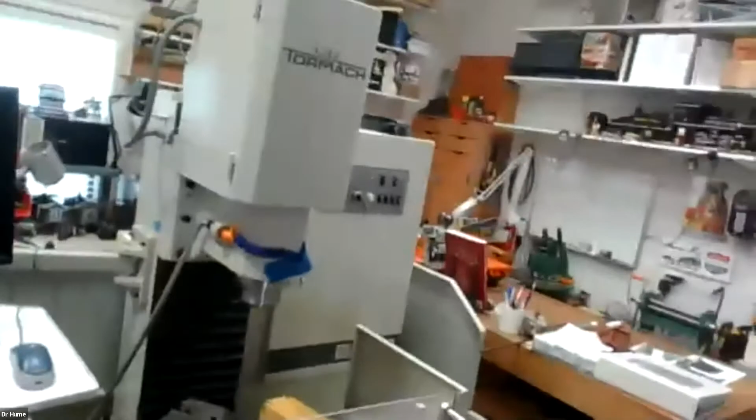Do you think we should start? Perhaps we could start with a tour of your facility and show some of the machines. I think that's probably good - we promised everybody an idea of what kind of tools and things I use. I've got my computer and some of my locomotives out, and we'll be talking about those, but let's hit some of the big machines first. What you see behind the locomotive models is called a CNC mill, and I'm going to show you how it works.

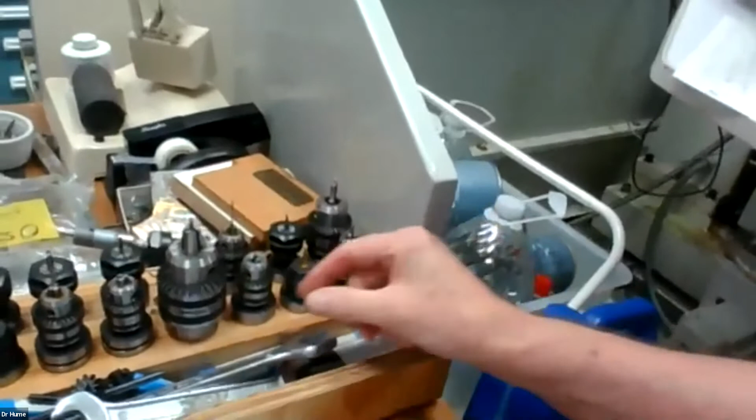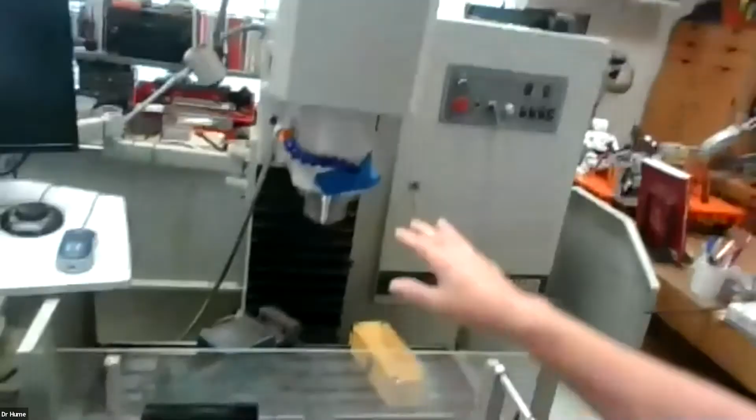Basically, a cutting tool is inserted in the spindle, and over here on the desk I've got a selection of cutting tools. I have drill chucks that can hold drills, and other holders that hold what's called an end mill, which is something like a router bit that can cut away and leave a flat pattern. This is a very versatile computer-controlled system where the spindle can come down or back up, and the XY table can move around in X and Y, so you can do things like profile cut curves and level off surfaces.

Cutting curves like that is something you can't do easily manually - you need something like a circular table.

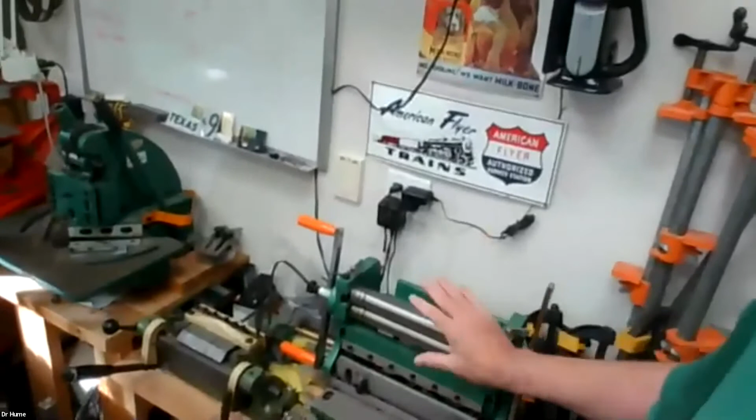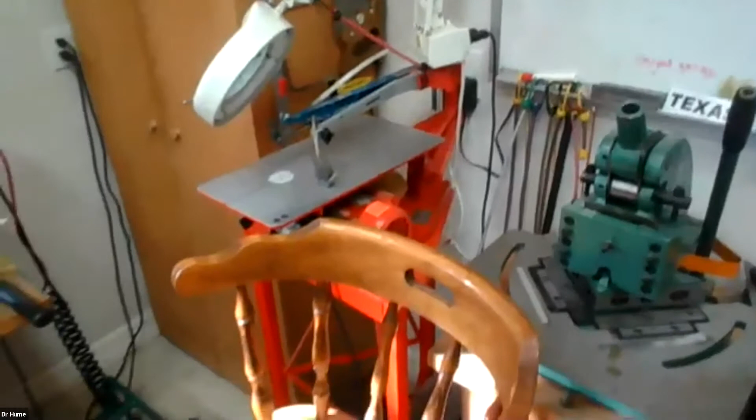I'm going to walk by some of the other shop equipment without dwelling too long on the smaller tools. This is called slip rolls, used to bend metal into curves, which you need for something like a cab roof of a locomotive. This little tool can grab the metal and bend it into a right angle or any other angle. This is a tool that can shear off a piece of metal or cut out a corner, and if you take a piece of aluminum and cut out four corners, you can bend it into a little chassis box.

This is a jigsaw, and I can use it to cut thin pieces of copper, like for boilers. Most people with this kind of tool use it for woodworking - and I'm sure you've heard of a jigsaw puzzle, well this is where that name comes from.

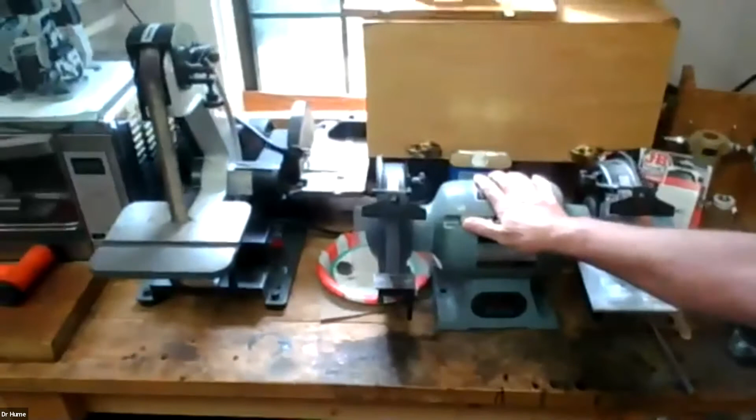Then I've got a grinder, mostly for sharpening chisels or tools I use on the lathe, and a belt sander, good for grinding away at something at a slower rate.

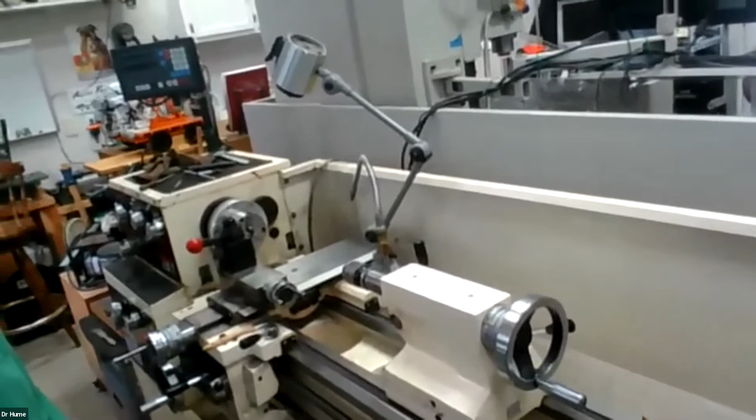In the old hobby literature, the lathe is usually referred to as the queen of the shop, because the old guys didn't have CNC mills - I'll show you a manual mill next. They did a lot of the work a modern machinist would do on a mill instead on the lathe, by adding various attachments.

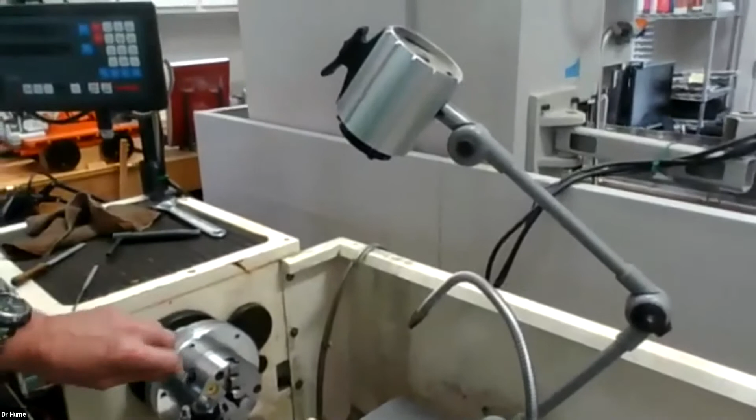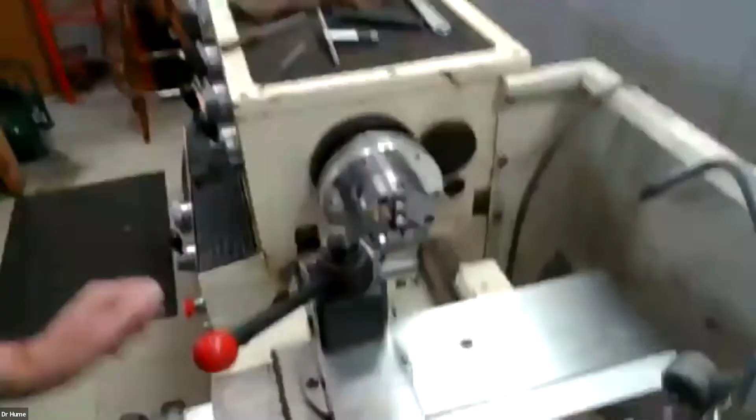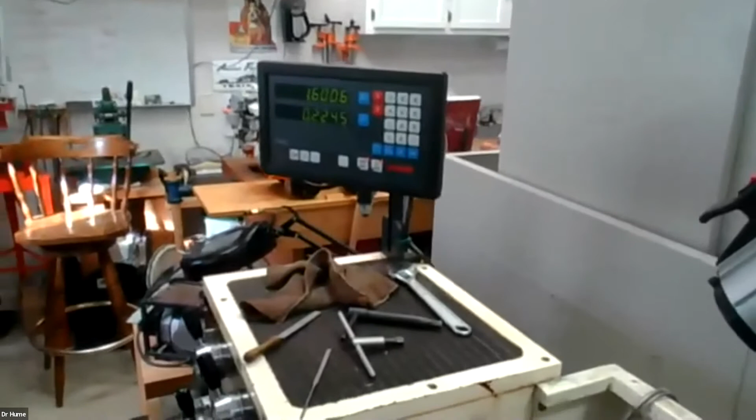To give you a feel for how the lathe is used, the work you're going to machine is held in a chuck - there are different kinds of chucks to hold various size things, or to hold things off center. The spindle turns this at say 1,000 RPM, and cutting tools are brought up and moved in and out to smooth off the ends. I've got a digital readout system here that can show the position of my cutting tool to within 0.2 of a thousandth of an inch.

So I can move over 1/4 inch and cut a piece off, and know that the feature I was working on is very nearly 1/4 inch.

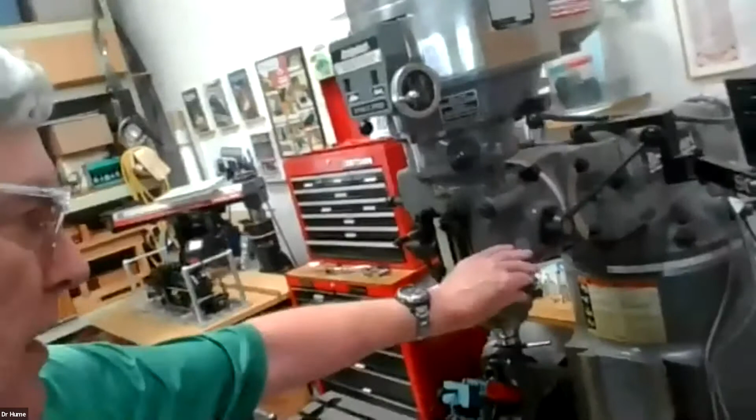This is the last of the real major tools I can't let you guys escape without seeing. This is a vertical mill, a good old American Bridgeport from Connecticut. It's computer controlled, it's got a spindle, and I can put drills in there. It's like a router on steroids for guys that do woodworking. This is my Z axis - I've got 4 or 5 inches here, and I can move the whole table up and down. It's called a knee mill. There's a crank, the table's about 4 foot wide and maybe 12 inches deep.

You clamp things - you have a vise typically to hold something, or you clamp your work to the table, and then you sweep it by X and Y. If you've got an end mill and you're cutting a groove, or leveling off, you move it around in X and Y, and come down in Z if you're drilling.

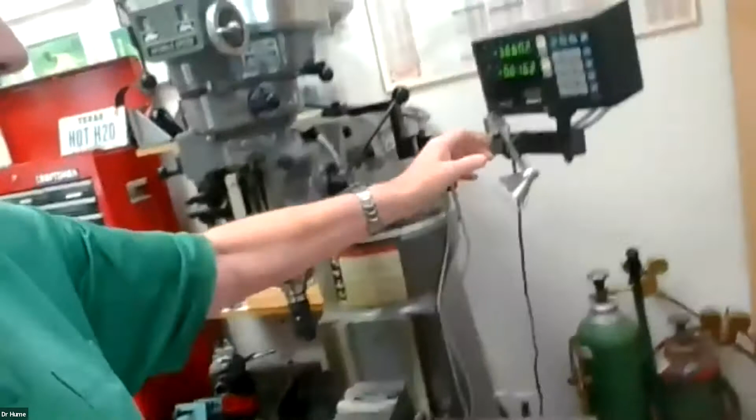And again, I've got a very sensitive digital readout system that's accurate to 0.2 of a thou. So when I'm making parts for a locomotive, I always try to make it to within 1,000th of an inch of the design or the plan, even though most of the time that level of precision is not needed. It's kind of an entertaining game, to see how close you can get.

And then on a critical part, like the fit of a shaft in a hole, when you really do need that kind of precision, that's been routine for you - you really are going to hit it exactly, because that's what you practice. You've got some very precise components, and we'll get into more detail on some of those as you wish.

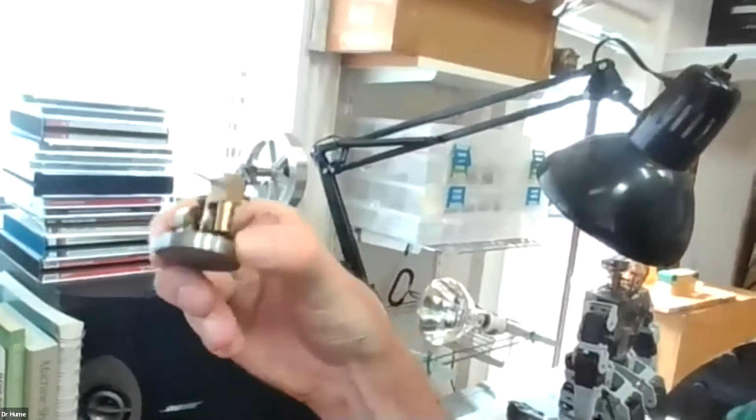But you don't start out building something like that locomotive. This is like the kind of motor that I really started with - it's a little wobbler engine, based on a plan originally published in Live Steam magazine, and then available in some of the books that Village Press sells. Little projects like this, where you don't have much material at risk, is where you do your learning. So that was engine number one.

And then engine number two was published in Live Steam magazine, the plans for it. There's a lot more time taken - this beautiful flywheel and the engine frame are made from aluminum and milled out. That's beautiful.

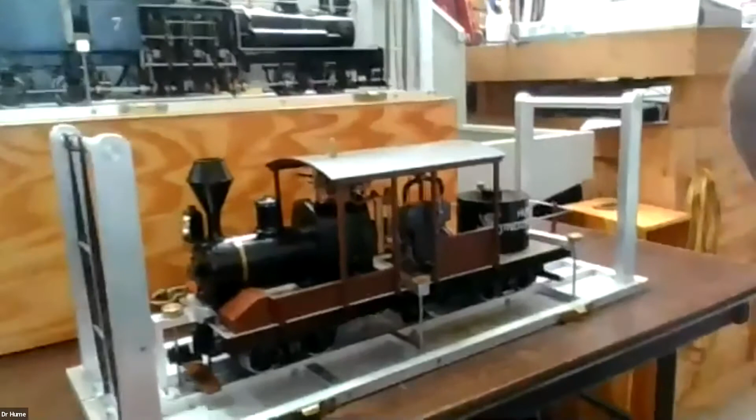Sure, you're spinning through different topics here. This is the Climax, a locomotive featured in the book. The lighting's a little tricky... oh, there we go, yep, that's better.

That's my latest locomotive, after years of working on locomotive models that were very closely based on designs published by Kozo Hiraoka, who is from Japan and has published designs on building the Shay, Climax, and Heisler. I basically took my learning and his techniques and repackaged them into building an old-fashioned Climax locomotive.

This is the Model A, Class A Climax, and it's got some interesting features. It's got an upright motor that's kind of small and difficult to see. There's a lot of pictures on Flickr showing how I made many of the parts that went into these, with high resolution photos so you can see and understand the various parts and assemblies.

Excellent, so that Flickr site, why don't we go to that, because I can show the Shay running, give people a feel for that.

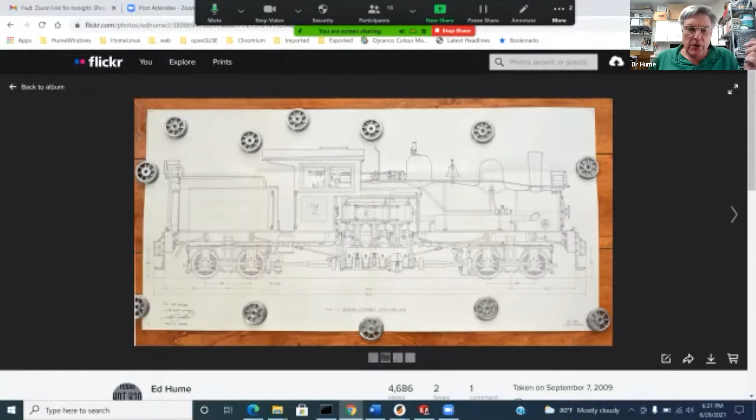I guess I'll click on this. This is the original magazine design that Kozo Hiraoka published, for 3.5-inch track gauge, and the water tank is on the same frame as the locomotive, main cab and boiler and motor.

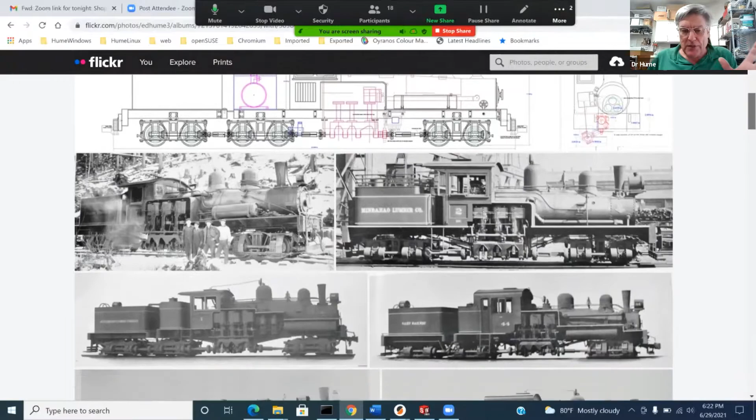I modified his plan substantially. This was before I was doing 3D CAD, but I basically added another truck and an extra water tender, and had to reproportion everything to make it work as a model of a narrow gauge locomotive, which means instead of the track size modern railroads use, they were only 3 feet wide.

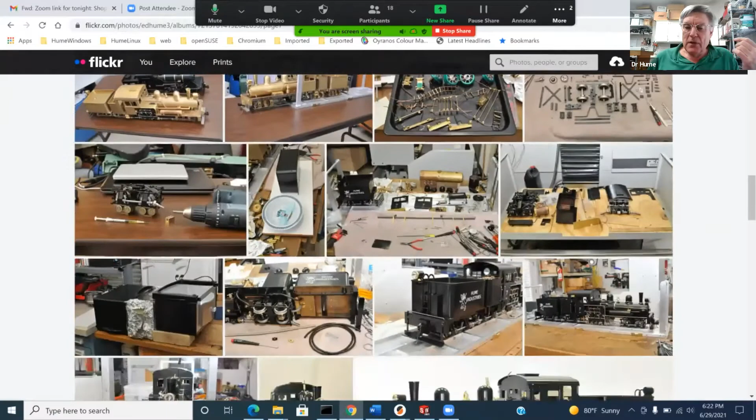I'm scrolling through things very quickly, and if the person interested can come back to the Flickr pages and go step by step. I just zoomed to the end because I wanted to start with showing the locomotive running when it was all completed.

This is a view of the locomotive, only about 1.5 minutes. This is running at a park in Houston, Zube Park, where the Houston area live steamers have built a track. The size of track here is gauge 1, which is 45 millimeters.

Now this is a real working locomotive. The gray can in the car there is butane camp stove fuel, and it's being burned underneath the boiler. It travels through the smoke tubes and out the stack, and it's a very clean burning flame, so we're not seeing a lot of smoke. You'd see steam on a cold day or a moist day.

And the Shay is an attractive locomotive because all the motor and mechanism is on the outside, so you can watch it as it goes by. I guess we can stop. Okay.

That crankshaft is amazing, I'd love to see more on that. Yeah.

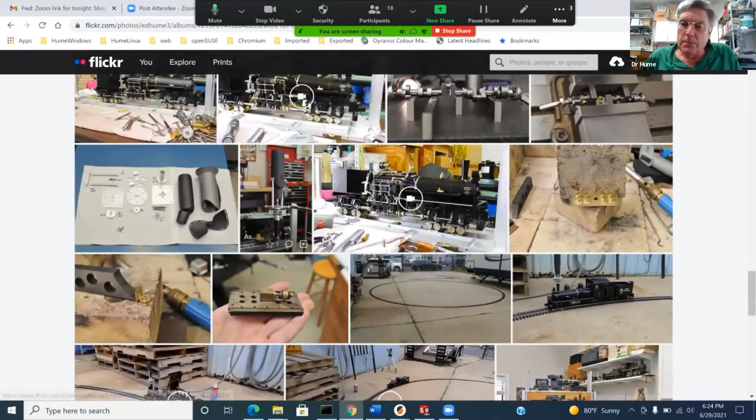And you mentioned the crankshaft - there was a story when I first made it. It's really quite a bit of work. It was bent slightly, not at the parts of the shaft that were supposed to ride in bearings. You could see a little gap of light there, and I had to understand that the crankshaft was not straight. Then I came up with a scheme to bend it back straight.

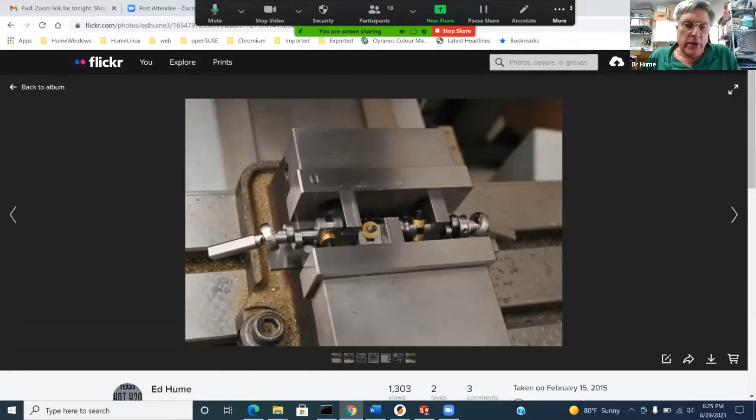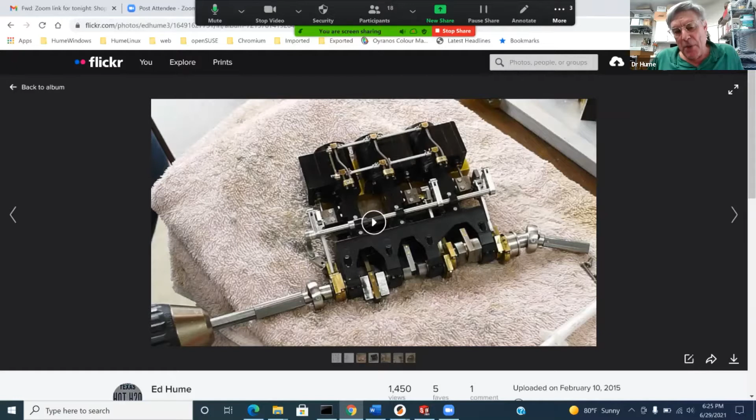I could show this interesting minute and a half or so of breaking in the motor, using a cordless drill to run it. As it's running I'll explain a little about the valve gear - this shaft here, with little arms attached, which can pivot to set the valve gear position. Hello, today is February 10th, and I thought I'd give you a view of breaking in my Shay motor.

I'm running the motor action with a cordless drill. As seen from the back, I'm connected to the rear coupler, turning the shaft in a clockwise direction, which corresponds to the locomotive running in reverse. The valve gear along the front - the rod that holds the links reaches in and sets the forward and reverse positions on the valve gear. Right now they tend to find a path of least resistance by shifting into the proper position for whichever way you're driving the crankshaft.

I'm going to reverse the motor now, and this will take it in the direction of the locomotive moving forward, and you'll see the valve gear reposition itself to correspond to a forward valve setting. So here we go. The valve gear shifted - it found a position of least resistance. I'm running this under a cordless drill, and the motion is somewhat stiff, but as I run it more and more, it becomes looser.

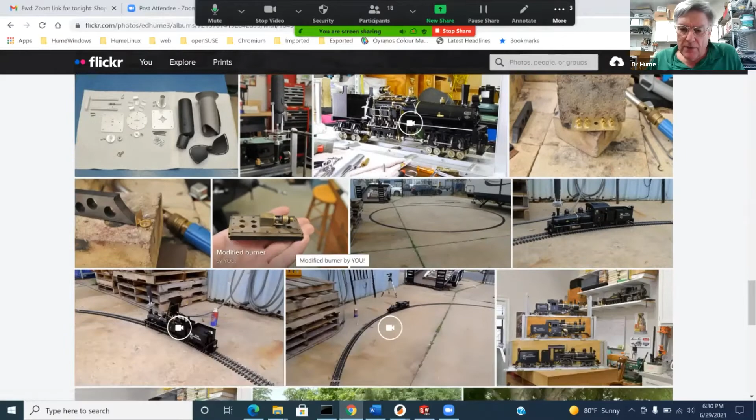Wow, that's great. If I get another view of the crankshaft - I think I'm making it on the previous page. Okay, so here's the view we were looking at. Those are the eccentrics, moving my mouse - one of them's for forward and one for reverse. Got it. Then the pistons are on these arms. Here's another set of eccentrics in the middle, and the last set is on the right. There's actually another eccentric here, which is running an oil pump.

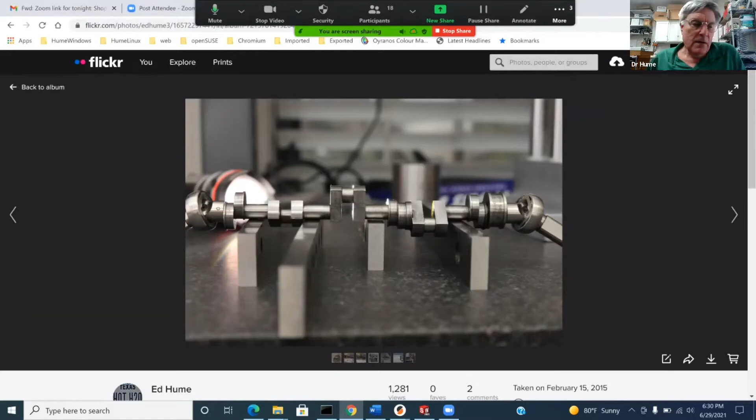Ah, okay, and so that's something I added to the plan that did not exist in Kozo's design.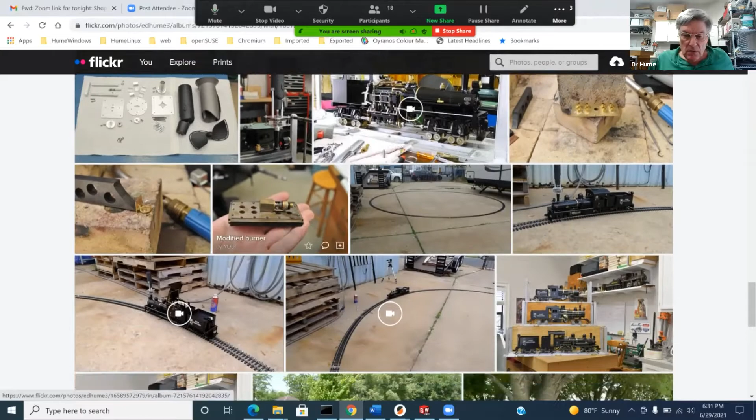By the way, I believe you have Kozo as an option - you have a separate connection to him, true? I've been fortunate enough with my professional software work to have been over to Japan initially to visit him, but I do have a folder of his locomotives from visiting him in Japan. Yes, there you go. Is that actually a cool boat?

The harbor, and we saw some sumo wrestling. Oh my, that's great.

And this is the master, Kozo-san. Believe it or not, his drawings are not based on CAD. He hand draws every little rivet, every little screw on these wonderfully detailed plans.

This is one of my favorite pictures. He's designed and built each of the three main geared locomotives. This is a Heisler locomotive, which is like a V2 engine.

The cylinders come out at 45 degrees. And this is the Shay, and you can just get a hint of seeing the cylinders like you saw on mine. And this other engine is a Climax. Instead of having the pistons connect to the driving wheels, which is what you have on a typical rod engine, they connect to a shaft, which is geared for more power to a shaft that drives the trucks.

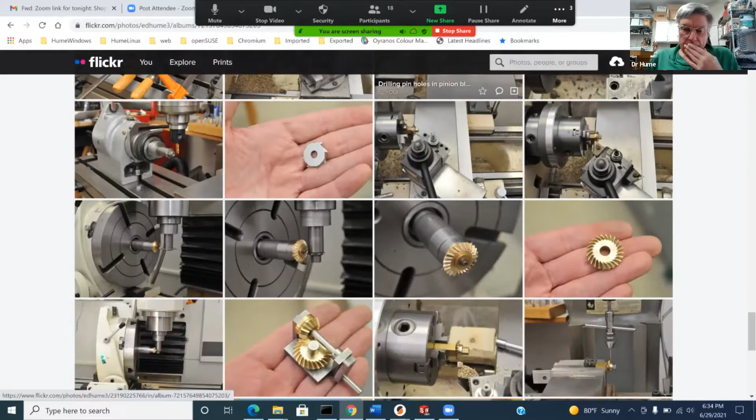Do you want to show us a sample of the two different gear assemblies? There's a simple bevel gear where the axis is directly over the other, and then there's the complex one right above. Those curves are really quite complex.

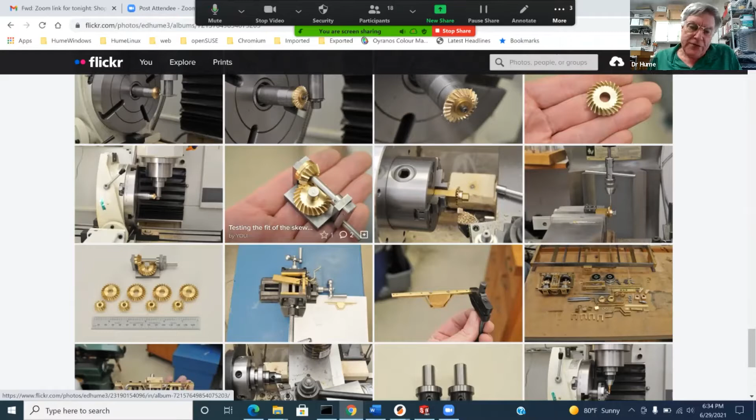So what I'm talking about with the Climax, these are skew bevel gears, and the shafts are not in the same plane. So with the locomotive, this meant that the drive shaft for the trucks could pass above the truck axle.

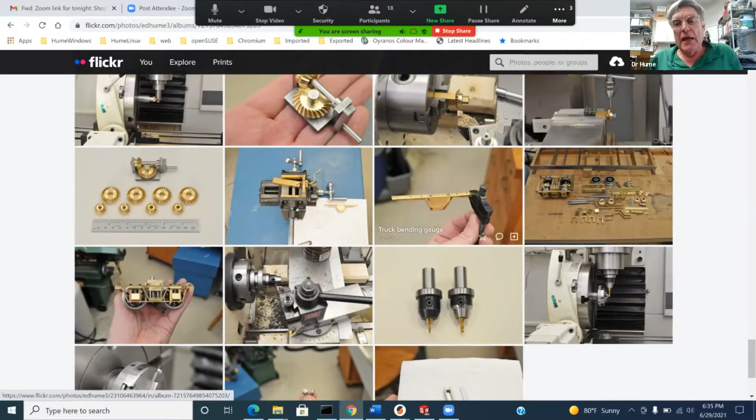And with the ordinary bevel gears like the Shay features - I'll stop sharing - these are ordinary bevel gears, and this is a little test jig that I can use after machining gears to make sure that they're going to mesh smoothly.

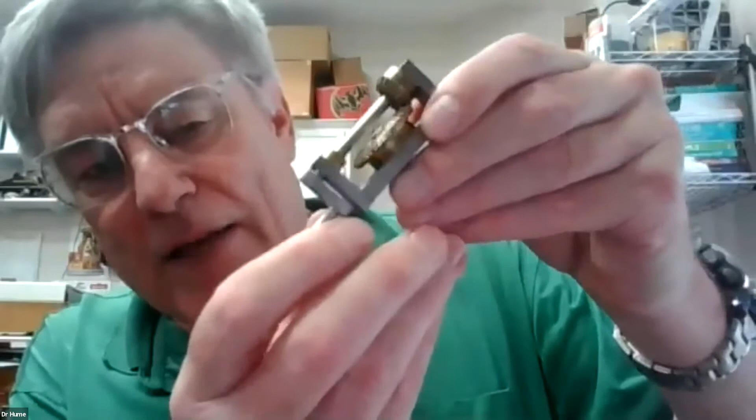I got all my dimensions right. So this is the kind of gears used on the Shay, and the fact that the shafts cross over each other means that on the Shay locomotive, the power shaft ran along the outside of the locomotive, the shaft and pinions ran along the outside, and the big gear that was connected to the axle was at the end of each axle.

So the Shay had no choice but to have the shaft on the outside, and that made for uneven weight distribution. I'm told it even wears out the track under the motor faster.

And then this is the difference with skew bevel gears. There's far more complicated math to figure out how to have the gears, how to cut the teeth so they're off center and they're going to mesh smoothly.

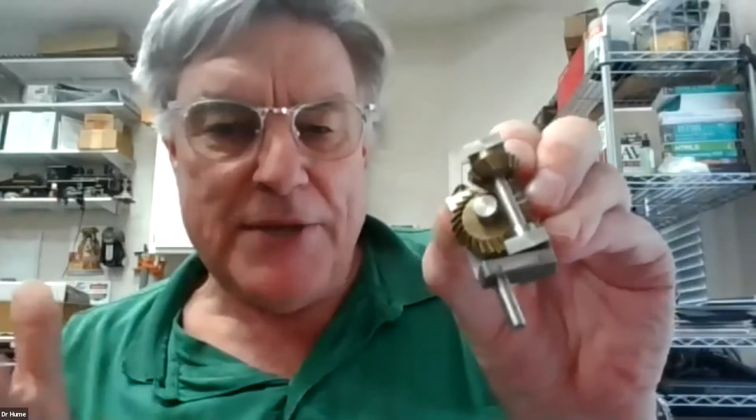And what I understand is the gears that I've made for my model, based on Kozo Hirooka's development of a technique to machine these gears, are actually better characterized in mathematical terms than what they had when they made the prototype locomotive.

I'm told they'd have the old guy in the foundry area carve up pieces of wood and file and sand till they had masters for casting. They would do that iteratively by testing the fit, filing off a little more here, sanding there, and then they would prepare castings. In the book and in the pictures, I show a complete process for making these kind of gears with a CNC mill and a rotary table that's indexing one gear tooth at a time for the next cut.

Yeah, that's quite a story. We actually have more precise gears than they had in the prototype days.

That's amazing. Now, another mathematical challenge you had was what do you call it, a sand cap? Oh yeah, the sand dome on the Shay.

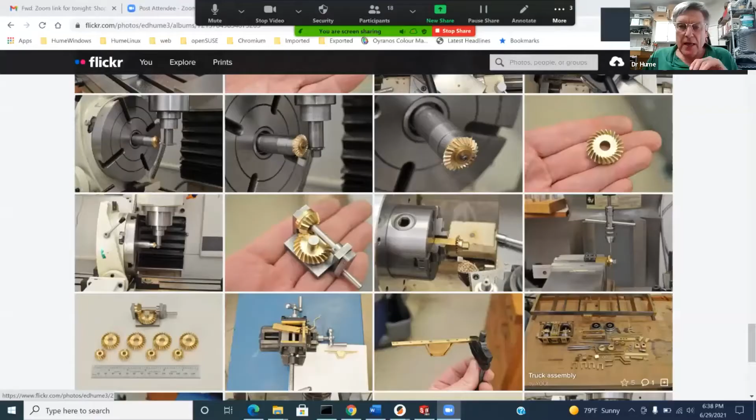Sand dome, yeah. Okay, let me go back to screen sharing here and share. We're going to go back to my albums and go into the Shay. Let's see, I think that's pretty far into the locomotive build. Let's see if we're lucky. Yeah, here we go.

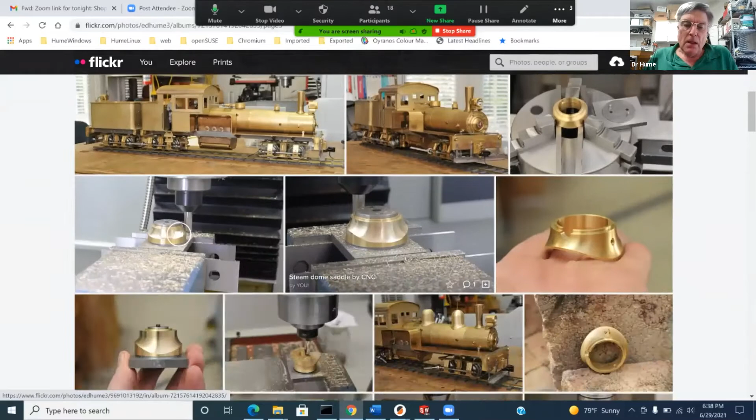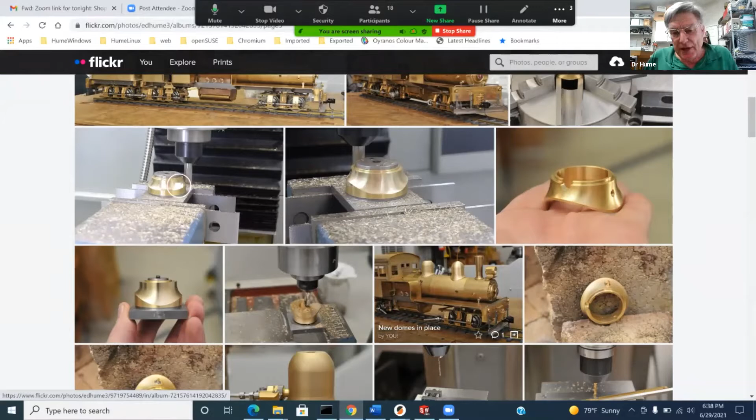This is the part we're discussing, the steam dome, and it sits on an oblique conical solid. This is not a true cone. It's something like a true cone, but the bottom of it is straight, and only the top is tilted.

I basically developed a mathematical description of the saddle surface that's needed, and I devised a scheme for how to hold the metal part and first machine the top. This will be a brief taste of what it's like to see the CNC mill run.

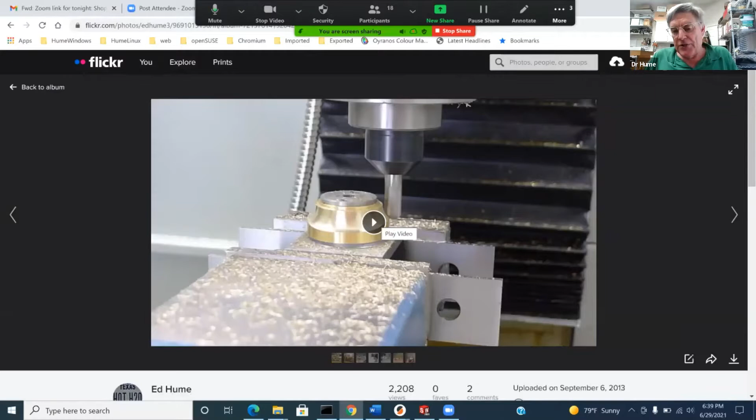This is a ball mill cutter. So the math of figuring out where the ball mill cutter is going to cut, you don't just assume it cuts at the bottom of the tip. It cuts at a certain angle where it's like tangent to the action.

So trust me, there's a lot of math in this because we're basically cutting something that's going to sit on a saddle, and it's going to have a uniform thickness above that saddle. And so that's the CNC mill.

Then after that part was profile cut, I had a scheme for how to hold it upside down, and another program came along and cut the saddle. So yeah, this was software I developed from scratch. This is the kind of stuff I do for fun.

Yeah, that's quite impressive. And just so people get an appreciation, a typical locomotive has hundreds of parts that you're machining and milling, right? Not just a few.

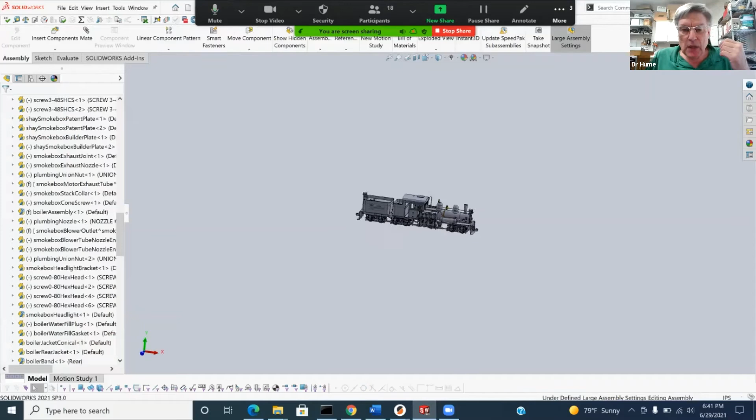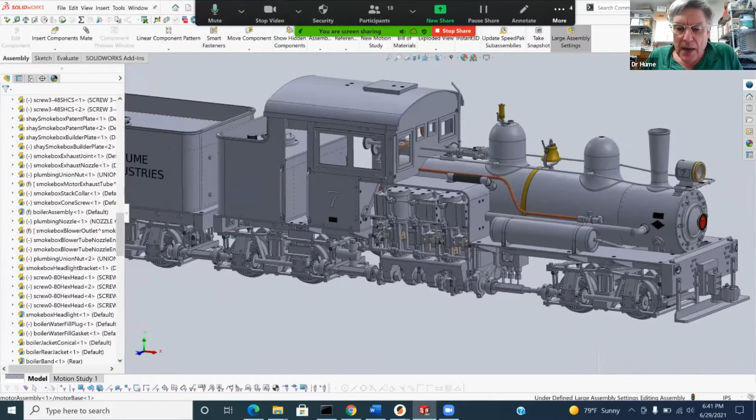Yeah, okay, I'm sharing my screen, and I brought up the design for the Shay, and as it was loading, it told me there were like over 1,600 components. But most of those components are like screws and things. So it is probably true that there's 400 parts or so that I'm actively involved in machining and making from scratch.

There's little springs and things, and those are made from scratch, winding them on the lathe.

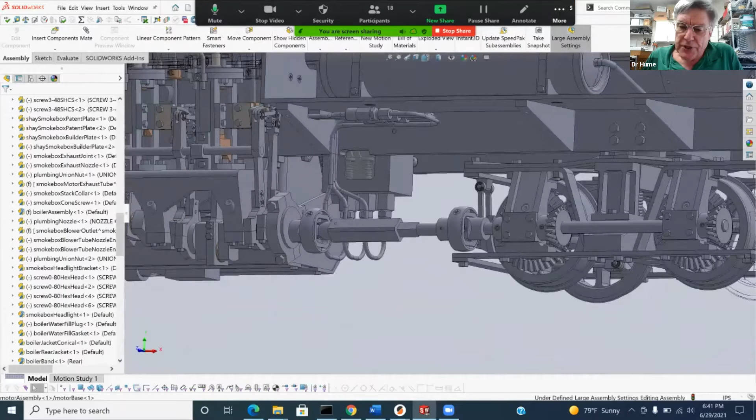There's a lot of pictures and information on building, on how I made the wheels by cutting them out by CNC. And this CAD, this is using the software called SolidWorks.

And I got proficient with using the software after building this Shay. If I had it before I started building the Shay, it would have probably shaved a year or two off, because every time I went back to the plan, I'd have to spend 4 hours figuring out okay, where did I leave off, and what are the dimensions going to be.

I kind of got to figure out a mess of dirty marked up drawings, to kind of figure out where I left off and what the dimensions were, everything. And now that I've kind of gotten on top of the 3D software, let me tell you how wonderful it is.

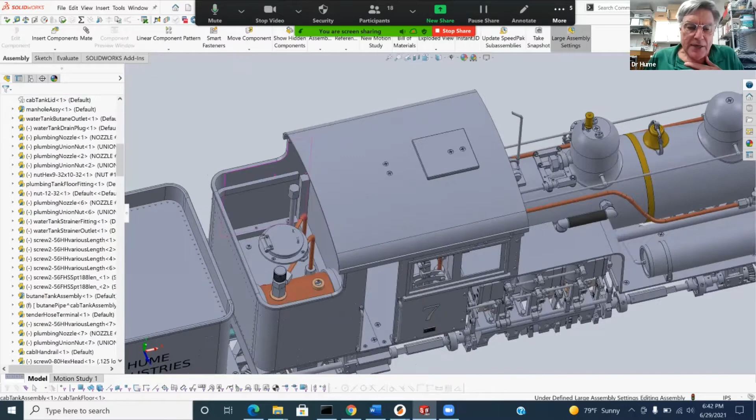I can do something like I just hid the tank lid, to show you this is the butane tank and how it's going to fit. And I can work out the paths for all the plumbing.

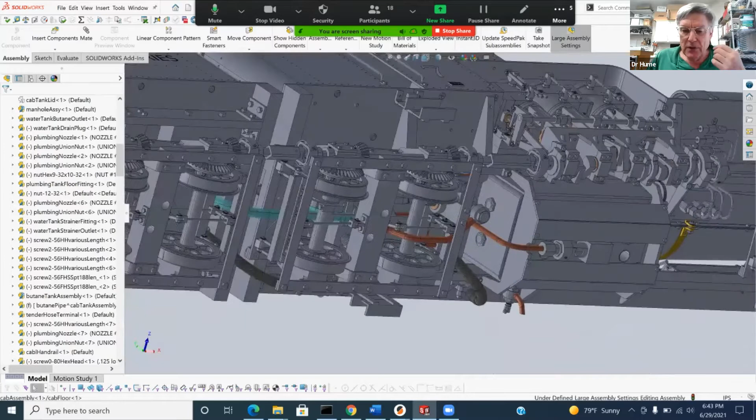Look, immediately look underneath the locomotive. Yeah, and plan how the piping is all going to come together with everything having room.

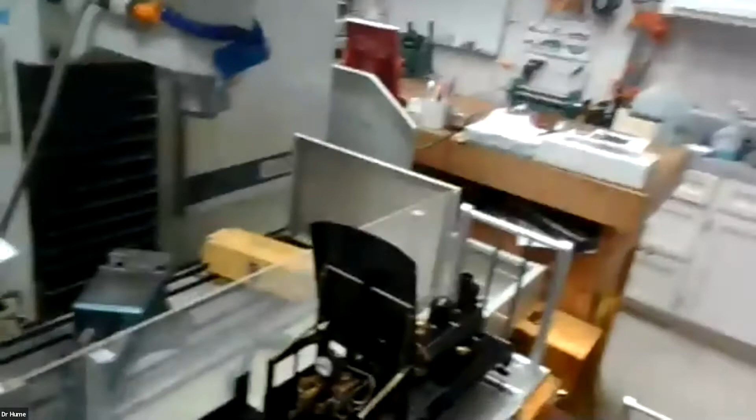And I'm gonna stop screen share, and I'll show you. I've been talking about that Shay, so let's go back to it. Let me open up the cab and just give you a feel for it.

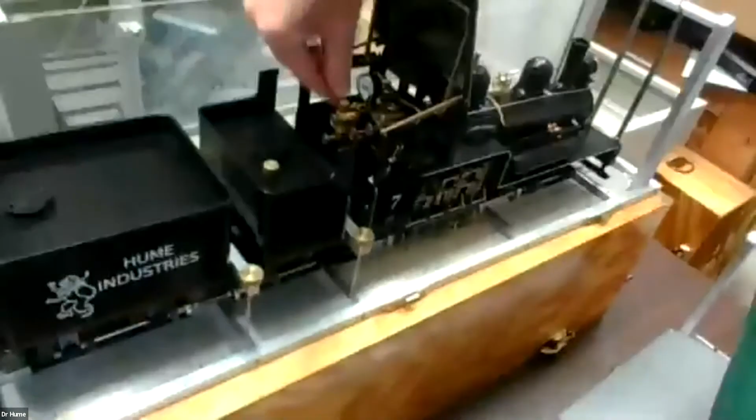Yeah, it's a real steam locomotive. I got a little pressure gauge, and there's a little lever here to blow the whistle. I love it, it's got a real whistle.

This shaft is the throttle, and I was explaining how it— I don't know how well you could see this. It controls a little jack screw and a lever to very precisely regulate the amount of steam.

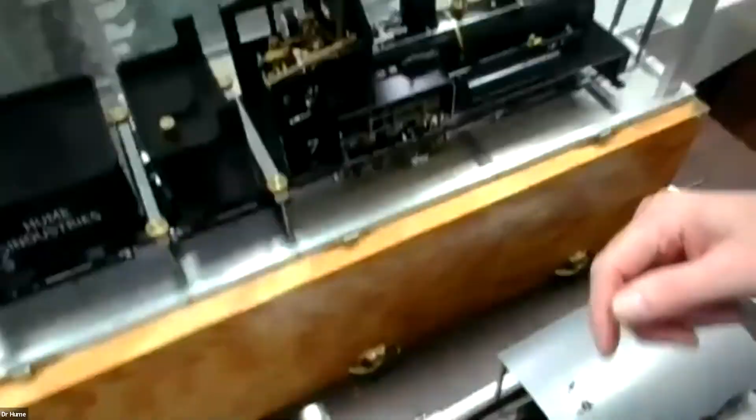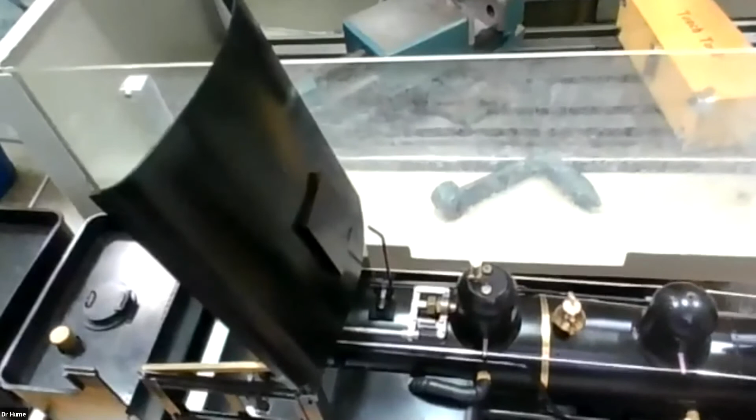Can you come in from the top a little bit more and show us the throttle? Because you definitely have the throttle that they can grab right there. Yeah, the actual handle that they grab and pull forward and back. What do you call that? Could I call it the throttle? They don't pull this, you turn it.

What's the lever to the right of that, nearer to us? There's a lever with a squeeze handle that can be pulled backwards and forwards. What is that, this little one down here? Yeah, can you see it? That's the whistle. Okay, that's the whistle.

Now this one here, these are the little drain cocks, I don't know if you're seeing that. It's kind of subtle what it's doing. I'll show you changing the gear direction. You ought to be able to see this pretty well if I've got my camera aimed right. Yes, there you go - this is to go in reverse, neutral, and forward.

So you saw a little bit of that in the motor video. Yes, that's what that is - that's forward and backwards. What do you call that handle that you're moving back and forth? What's that called?

Just the valve gear setting. Yeah, you know, on a rod locomotive... okay, you're asking kind of a...

I'm going to tell you what a Johnson bar is. The joke is you go into the gas station and they tell you your Johnson rod's bent or something. This is the Johnson bar, and on a conventional rod locomotive that you're used to seeing in Hollywood movies, that Johnson bar is playing the same role - it's connected to a lever in the cab to control the valve setting. Wow, so that whole assembly looks pretty complicated too. That's a whole nother story.

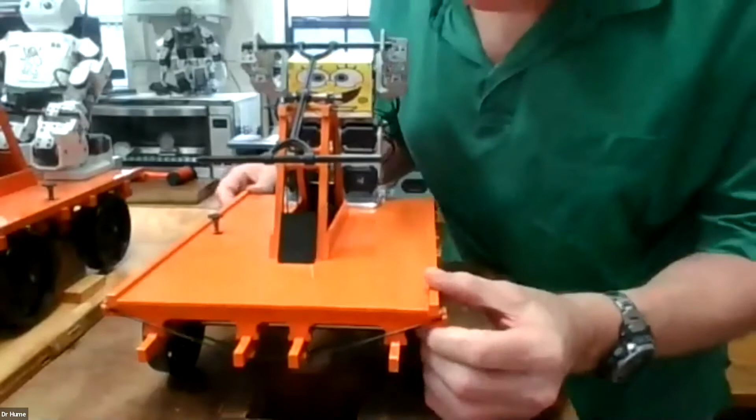Did you want to talk for a few minutes about these hand cars? Yeah, so after I finished the Climax A, let me set the computer down - this was my next project, an old time hand car, very similar to one that's at Disneyland. I built the hand car, and then a friend of mine said, wouldn't it be cool if you could have a robot run the hand car?

So I first bought a little Robotis Mini. Robotis is a company in South Korea, and this is an anthropomorphic robot, meaning it acts with human-like motions. I programmed it to run the hand car, and there's video segments of that on Flickr and stuff.

What I found out was the mini robot wasn't powerful enough. So what I did then was buy another robot, and I programmed two robots to run the hand car. They still weren't powerful enough to really run it confidently on track - they could run it on my flat shop floor. And then, this is like an MIT problem solving situation...

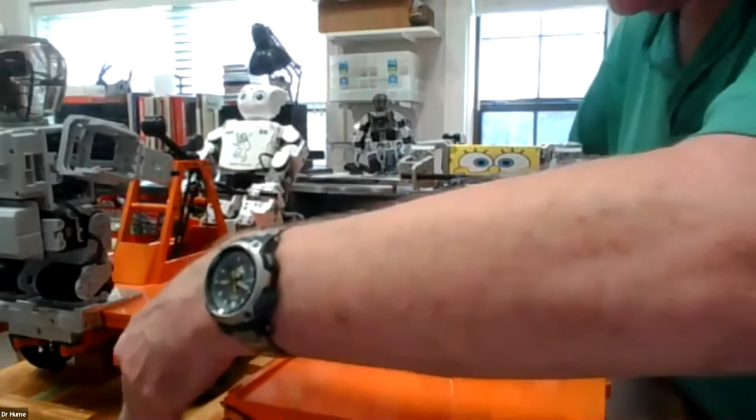So I said, well, on the hand car, when you're at the extremes of the motion, nobody's transferring power. What if I designed a hand car with dual cranks, so that when one guy's at the dead point and not transferring power, the other guy's at mid-stroke? So I designed and built this hand car that looks like something the Sheffield hand car company might have made in the 1800s.

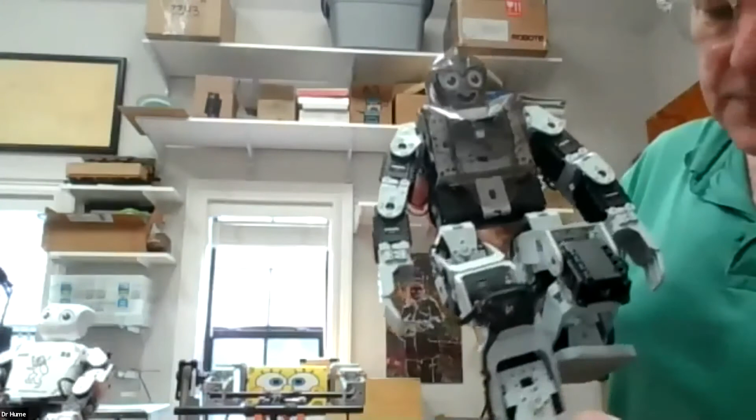It still wasn't enough - the two smaller robots, even with a dual crank hand car, weren't getting the job done. So then what I did was buy a more powerful robot, with servos that are like 4 times more powerful than that little white Robotis Mini.

So I used one of these robot kits and custom built it into what you see as SpongeBob. Instead of having all the different servos, I just gave him, what is it, 6 servos - the motions that he really needed to do. And so finally, I've got a robot that can run the hand car.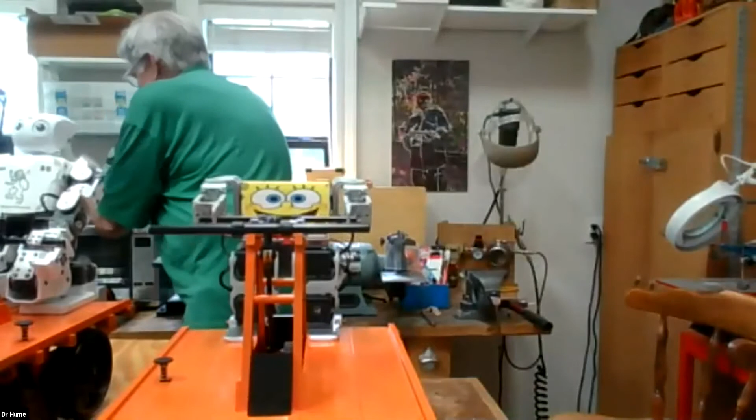So we need to go back to Flickr and show that video. COVID interfered with my plans to get down to Houston to run the robot and everything.

But finally, I got down Memorial Day, and I finally was able to successfully run him. Okay, I don't do this every day, so we're going to... no worries, we'll get there.

Yeah, I've got my Climax B sitting on the shelf in a case. I did put the Heisler out on my saw table, so you might have seen that in the background. Yeah, so there are the cases on the left. I love that you have them all put away nicely. That one's the Climax, I love it.

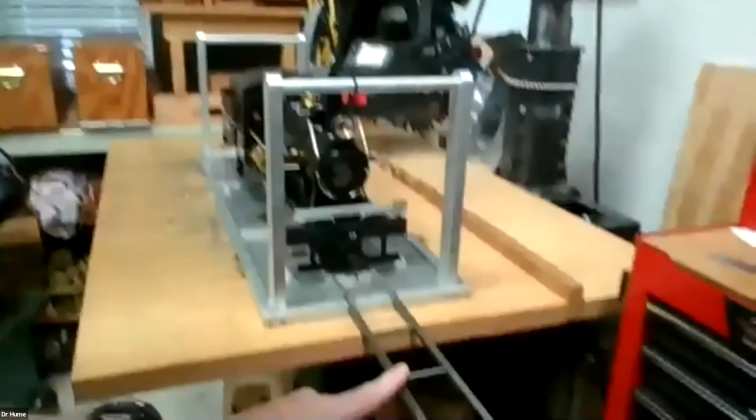Andrew indicated that these do have a ramp feature, so when I'm at the track, I can roll the hot locomotive down the ramp right onto the track. I love it, that's great. And I see you got it moored pretty nicely, you have a special, I don't know what you call it, but braces in place to hold the locomotive intact, so it can be shipped, or at least carried. This is clamps to secure it, so it doesn't bounce around.

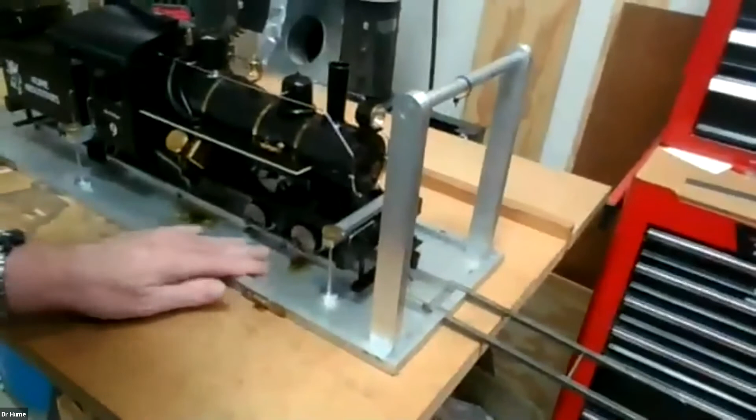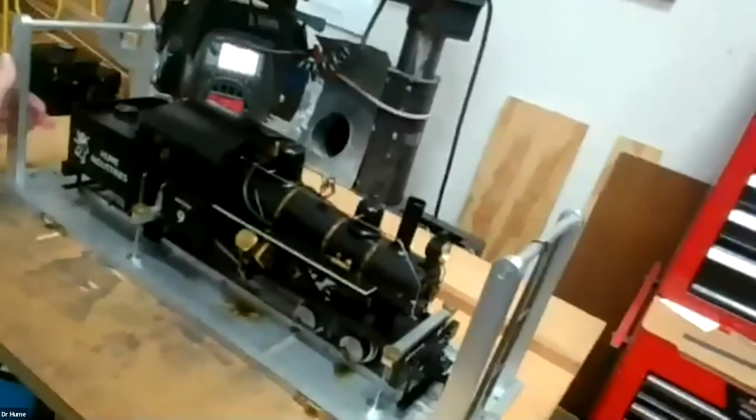And this is the aluminum that this is made out of, you can actually buy most of these sizes at a place like Home Depot. And this is like ordinary quarter-inch steel that's been machined, and again this can even be found at a hardware store. Although it's true that I do use industrial suppliers for most of my shopping. But the carrier becomes like a tray to hold little parts that I take off, and there are little recesses for the wheels. And because of the clamps, I can tilt it up to get at the bottom for lubrication and stuff.

So it takes about 3 to 4 weeks to make a stand like this. I've kind of got it down to a science now. And I've got the wood cases, that's part of that 4 weeks. So now that I'm doing all the CAD drawing, I've got another locomotive planned.

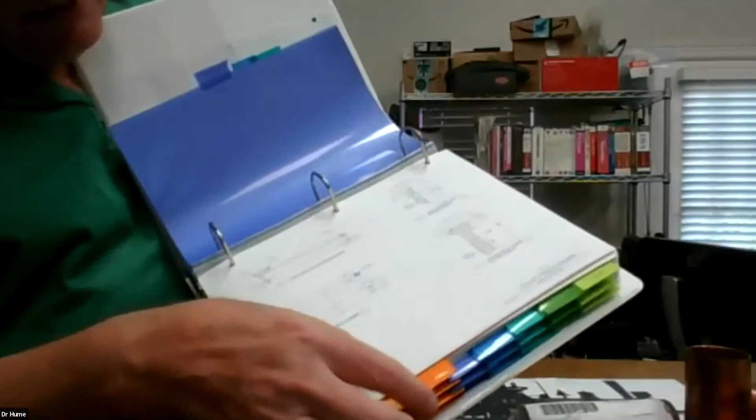I was going to ask you, what's next on your agenda? These are all the drawings, and it's going to be an old time small Shay. This is very detailed drawings of the 600 parts or so. And this is even information on how I'm going to clamp and make the wheels, and how this is getting into cutting gears.

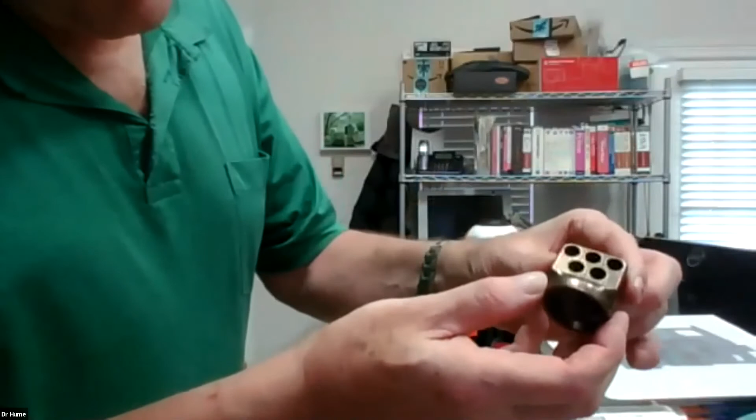I got a fancy burner thing going on. It's hundreds of pages of design work. The thing that makes this model unique is I've got a scheme where I'm going to use an ordinary purchased copper T, and standard pieces of copper to make the boiler. The person making this won't have to form copper or do all the hard boiler work bending copper, pounding it around wood forms. What makes it possible is this 3D printed metal I had made at Shapeways using a very expensive metal printer. This is like the top of my firebox, and I'll bore it out precisely to mate with the standard copper. Then there'll be a smaller smoke tube, like 3/8 copper pipe, coming out for smoke tubes.

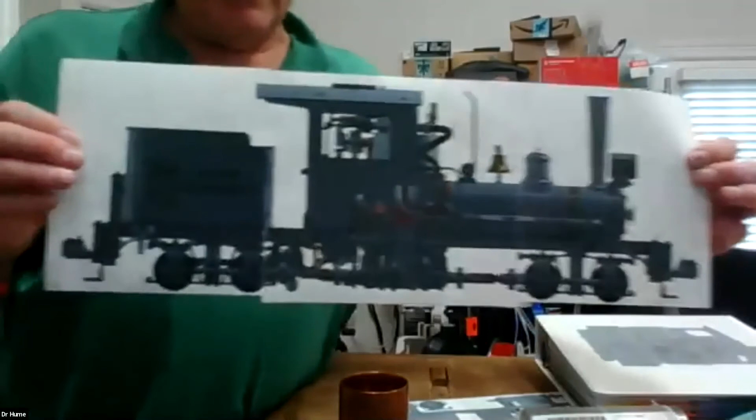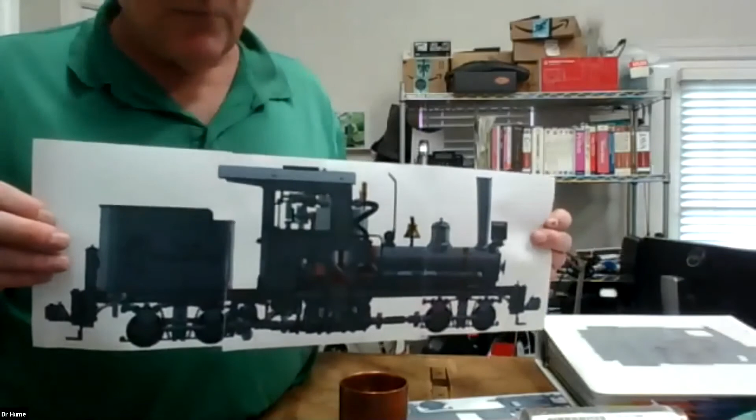How big will this locomotive be? I almost said train. I think this is actual 1-to-1 scale size. Now, is that the same gauge as the other trains you've built? It is. It's like an old time one. I kind of went back in time — Kozo did the more modern Climax. So I did the old time Climax A, and Kozo did a more modern Shay. Now I'm going back and doing a Shay with as small wheels as I can manage.

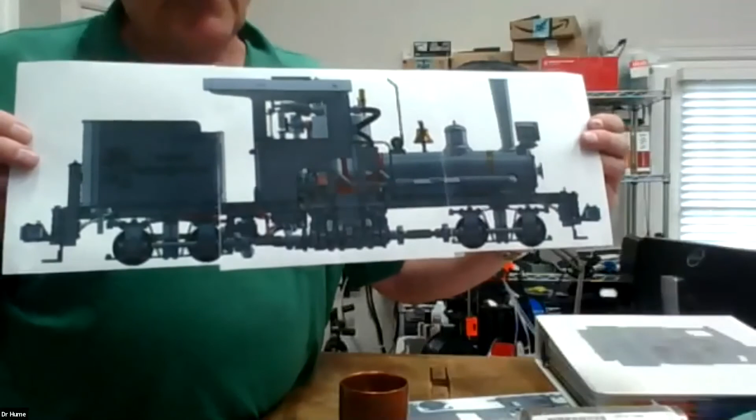So, typically, what do these locomotives weigh? Are you asking about the models or the prototypes? The actual models. Well, I could tell you that the Heisler — I steamed it up on Saturday and I actually strained my back lifting and moving it around. So it's probably at least 45 pounds, sitting there in that container. I actually think I put the size and weight information on some of the Flickr photos, because you don't know how much it's going to weigh till you're done. So on some of the locomotives I may have indicated the weight in the comments on Flickr.